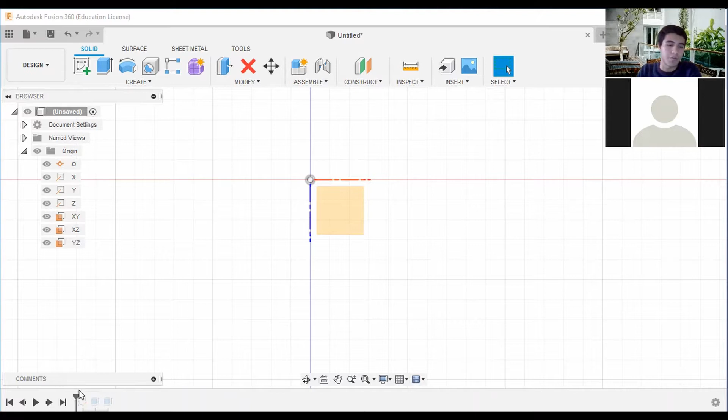You click and drag that tab and you can see the sketch. In this case I got a head start, but this is a sketch for a heart. Let's say I want to edit the sketch. I can right click and put edit sketch, and this will take me to the edit sketch plane where I can modify exactly what I want.

Let's say I don't want this heart, I want to change it up a bit. I can click trim and delete elements of what I want to change. So let's start from zero, scrap that idea, and start a new heart.

To go over some basic shapes and geometries for Fusion 360, we have our circles, center diameter circle. Let's do that to draw a heart, and I'll be modeling after this one I took from FIU. It's a nice little box, more or less fitting the size of my palm. I measured it with a caliper - it's like 70 by 75 millimeters.

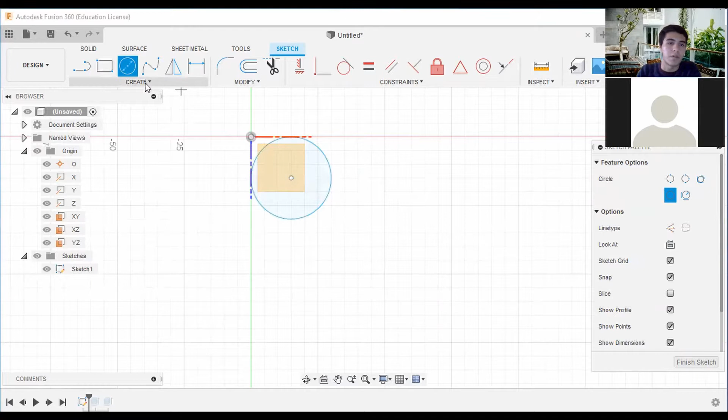So let's draw our circles. Those should be our hearts. We're going to draw a 2-point circle up here.

If by any chance you want to stop and ask me questions, feel free, go ahead. Otherwise I'm just going to continue, and you can watch the recording afterwards if you want to backtrack and see exactly what I've done. Yeah, you got it.

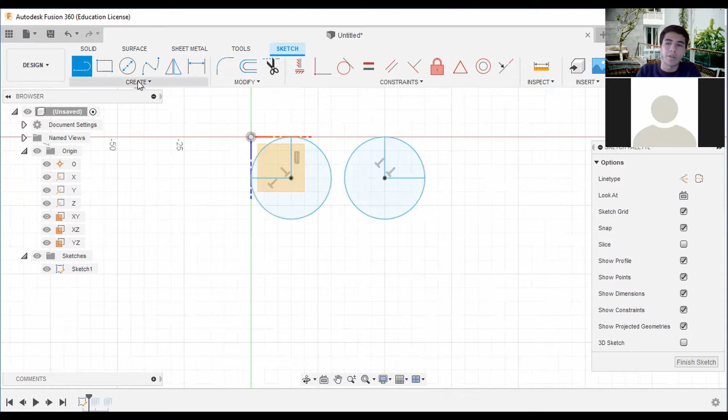The good thing between Fusion 360 and other modeling software like SolidWorks that I found beneficial is it's really easy to understand once you get the features. It's not like SolidWorks where you have to really put effort into it. Sure, practice helps, it goes a long way, but the layout of the features is much easier and more intuitive, if you ask me, on Fusion 360.

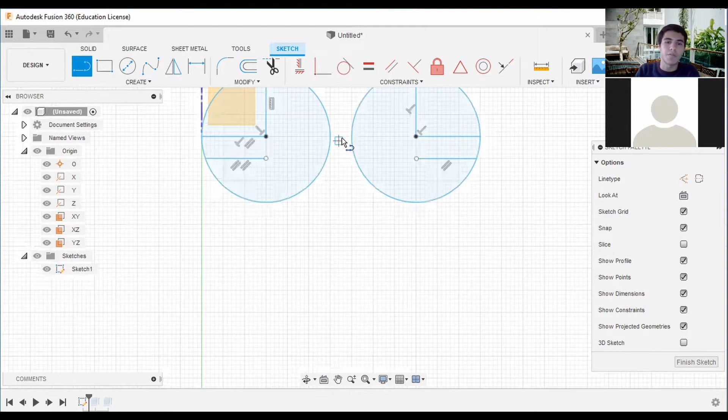Have you taken SolidWorks by any chance? No, not yet. So you probably were introduced into this before with Dr. Lim? Probably, I think so. Awesome.

So that's your advantage. We can start over fresh.

So basically what I've done so far is I've drawn the 2 hearts, and I've drawn a midline of the heart. You can see these constraints here - this T-looking thing basically means they're intersecting at right angles. This one means it's parallel, and this one in the middle means it's parallel.

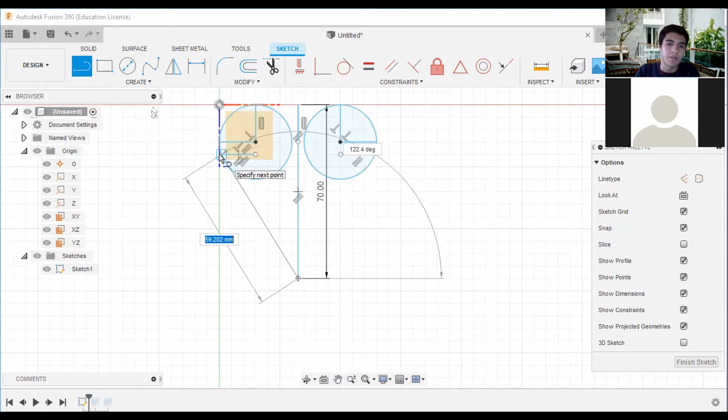So what we want to do now is create the shape of the heart. It's a rough shape, but you'll see we'll be editing these features afterwards. So what can you do now? You have this triangle-looking thing and these 2 circles.

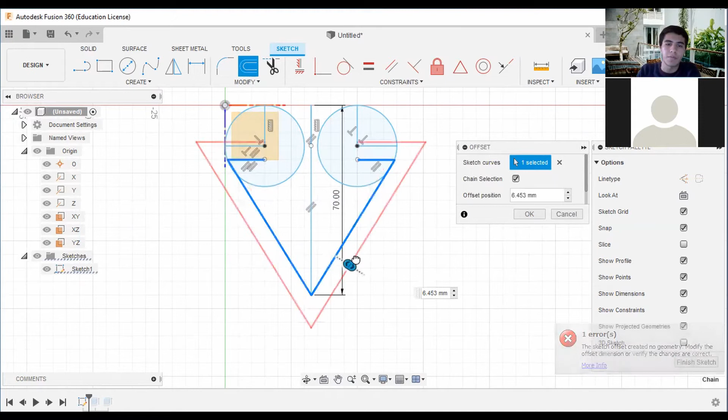Let me introduce you to a feature called offset. Offset is basically going to take a shape that you've drawn and offset it. That's useful if you want to create an offset of a sketch.

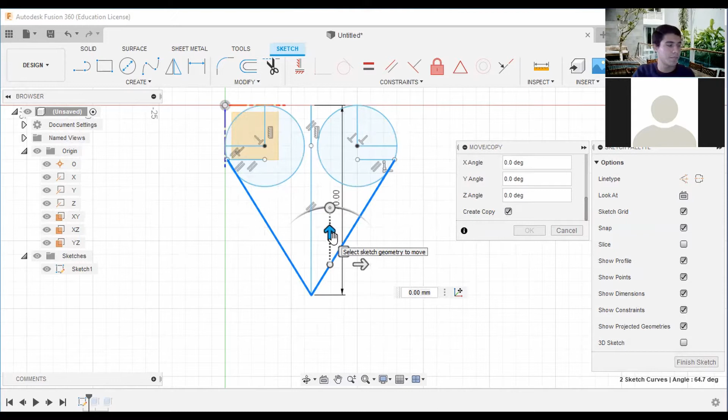But what I'll be showing you now is how to move and copy a sketch. With your mouse, you click move and copy, or with your keyboard you just click the shortcut M. Both ways work - you click and drag your sketch and move it. If you want to create a copy, you click copy, then click and drag, and it'll create a copy of your sketch automatically.

And that will be useful since we want to create this V notch on top. Let's cut this off - with our trim tool it'll cut off our extra sketches that we don't need. And now we can click fillet, and that will round our edges, which gives us this general heart shape.

You can do that here as well - 5mm fillet. So by the end of it, what do we got? We've got a general looking heart shape.

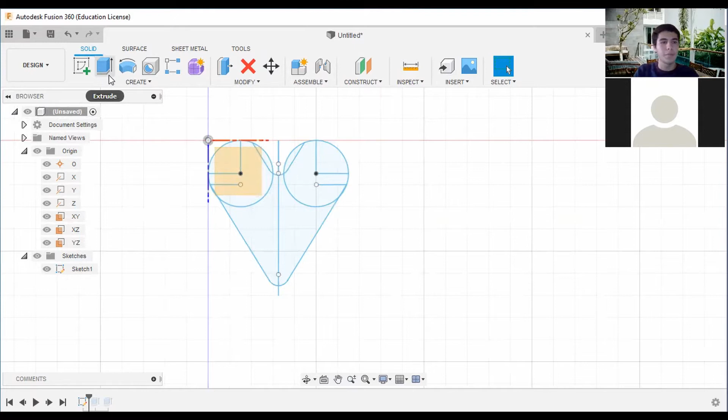And now we want to extrude this sketch to give it a solid body. So you click extrude. It asks us, well, what do you want to extrude? You go ahead and highlight all of this.

Now we want to select how much you want to extrude. 20mm is around the size that we're looking for. If you want to go higher, go ahead, that's fine - one feature that's new to Fusion 360 that I've noticed at least.

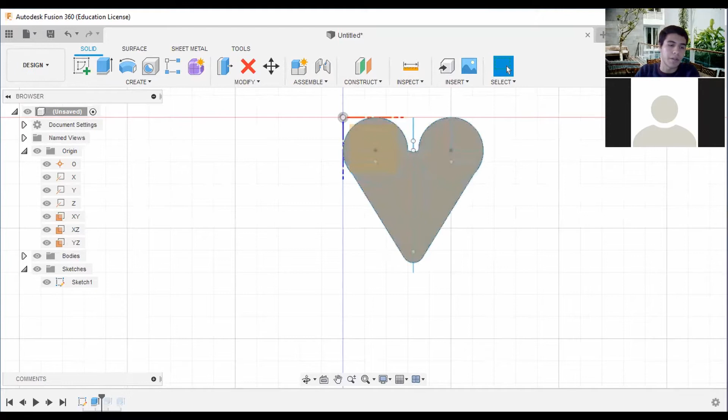So now you see this extrude shows up here. If you want to, you can go ahead and edit this feature. One feature I've noticed is new to extrude is this thing called thin extrude. So what's thin extrude? It basically creates an outline of the thing you want to extrude. See the difference?

The difference is between the blue and the gray, right? Say again? The difference is on the gray part that just showed up, right?

That's right. If you have thin extrude, it only creates a thin layer of the wall for that whole body. If you do a regular extrude, it'll create and extrude the whole sketch. So for this one, since we're making a box, it'll be much easier for us to do thin extrude.

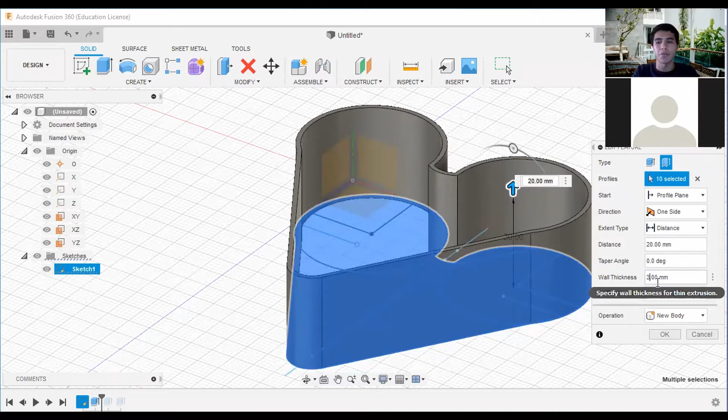We'll do thin extrude and set the wall thickness to 3 or 2. That looks nice, so 2 will be our thin extrude, and our walls will be 2 millimeters thick.

Now we have the walls for the box. We're missing the top and the bottom, which is just another extrude. So we have our extrude profiles, and we're going to click and drag everything again. See how it starts from the bottom? That's for our sketch. In this case, we're going to do a regular extrude, and extrude 2.

It gives us some options here to extrude, and we're going to do join, since we want this new body that we extruded to join our old one.

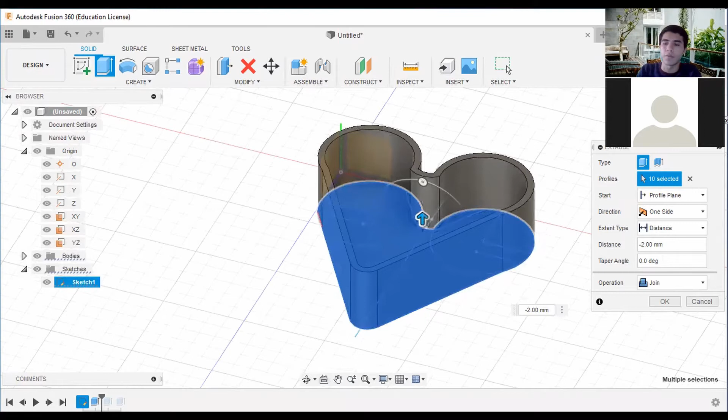On the left side you have your origin, bodies, sketches, and construction if you make any. Every time you make a new body or sketch, it shows up there. You can click this eye icon to hide it if it's bothering you. Let's say this origin is bothering me - goodbye, it's gone. Now I can just work on the bodies.

Any questions so far? Yeah, so far I think I'm following along. I'm following. Okay, great. Wait.

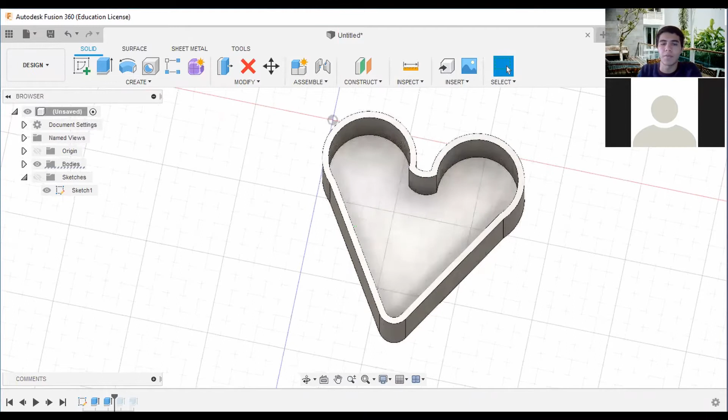There's one question though - I know how it showed the difference when you did the thin extrude versus the regular one, but what's the advantage of that? Where would you use it?

Sure. Right now, since we're making a box, it would be easier for me to use thin extrude because the walls are made automatically. If I use regular extrude, I have to make a new sketch so that it has the thinness of the wall. You see how I have only one sketch right here?

If I want to make an extrude the regular way to create the walls, I would have to create a new sketch that's the shape of the heart but smaller, so that I can extrude only the thin walls. So I save myself time by using thin extrude. Because it creates this sketch, it looks at the outer shape and creates an extrude based off of it. That's thin.

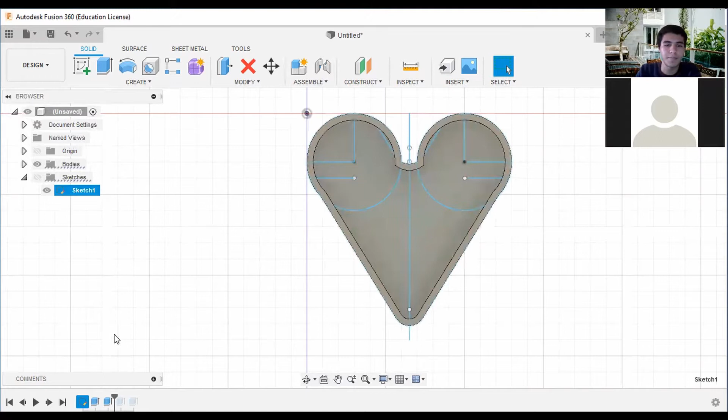Hey, but can you specify the thickness, or does it do it automatically? Yeah, I can specify the thickness here. I went to thin extrude, and you see on this, I can indicate the wall thickness of 2 millimeters. If I want to make it bigger, I can make it 10 millimeters. See how the difference is now?

Okay, I see that. So basically what you want to do now is create a top section for this box to cover it. In this case, it's going to be more or less an identical replica of this profile we have here. So what we could do is extrude this now.

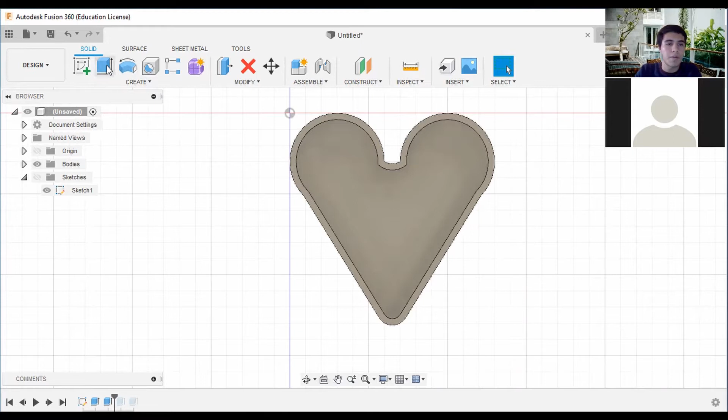One second. I can extrude this, and here we go. How about this, to make it even better?

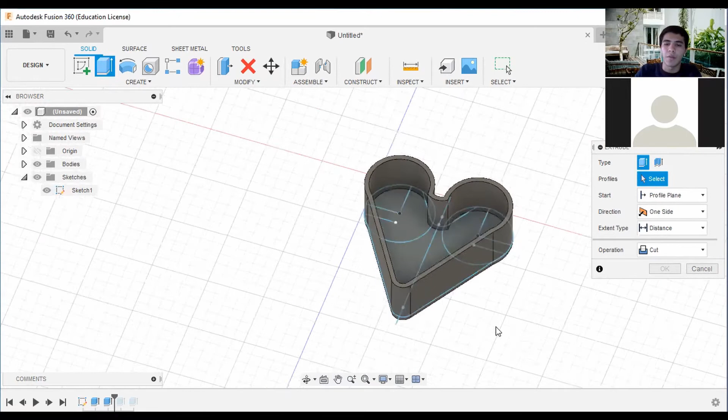We can create an extrude using our sketch that we had before, the bottom one. In this case I'll show you another type of extrude. The types used so far are thin extrude and one-side extrude. But in this case, we want to make it 2 sides - so what is the difference between making it 1 side and 2 sides?

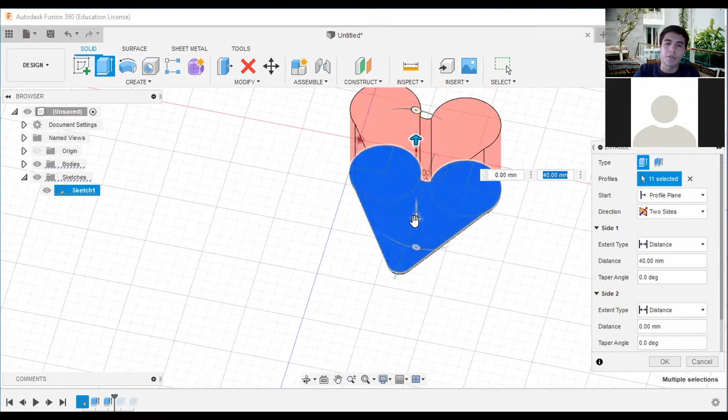One side is just going to give you one direction to extrude from, but 2 sides gives you 2 directions to extrude from. In this case, I want to extrude from this side, and grab the other side and bring it up to that level, extruding it as well from this side. That's going to allow me to create a body using the sketch plane, but offset from the sketch plane.

See how the original sketch plane is down here, and my new body is up here - because I was able to take the 2 directions of the extrude and bring up one direction so that the new body is up here.

Right now it's at 5 millimeters thick. Let's say we want to make it thinner - let's make this 3 millimeters thick, or 2 millimeters thick, and then we'll leave 2 millimeters so that I can ingrain it into the other one.

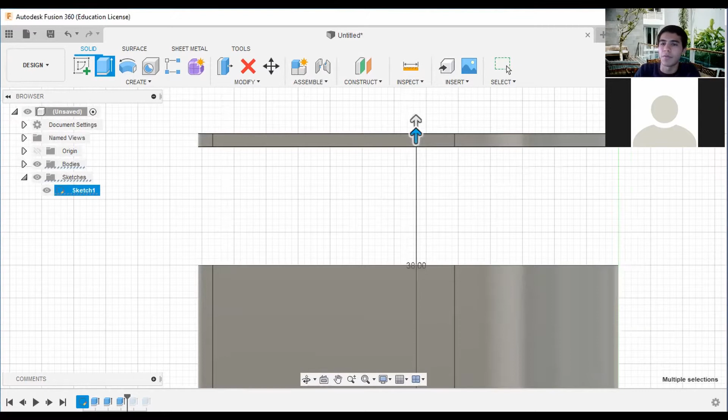What would this do? It would basically give us a new cap, and we can repeat this if we want to, for example, have this cap snap onto the other box. So let's repeat that feature.

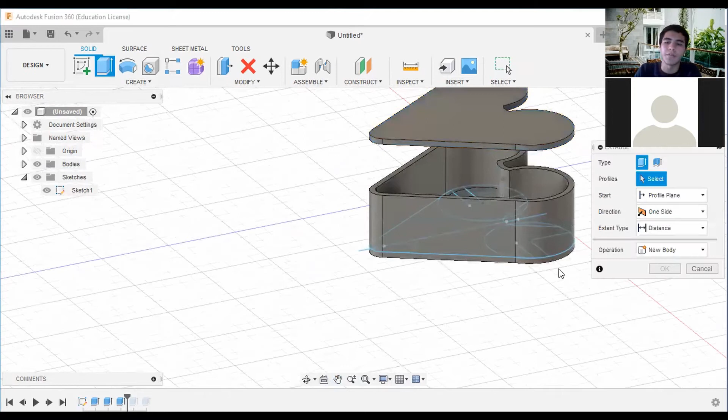Extrude again, and in this case we'll be doing a thin extrude - a thin extrude because that's what's going to give us this thin outline. And we'll do two sides.

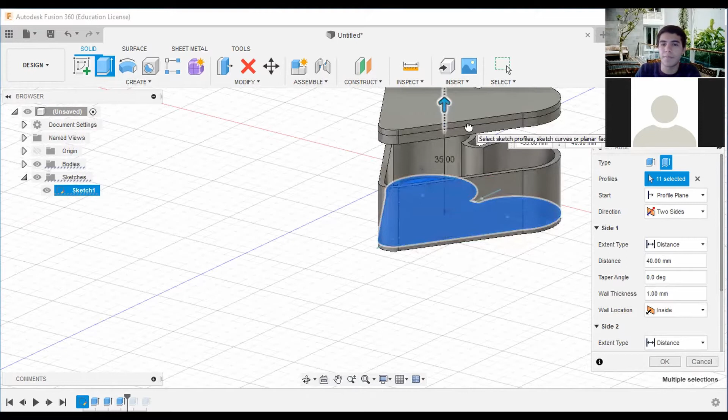There we go. So we have our thin extrude, let's make it 2 millimeters in. So it'll look like that. See our thin extrude? Yes, so let's take away this body now, and let's take away the sketch.

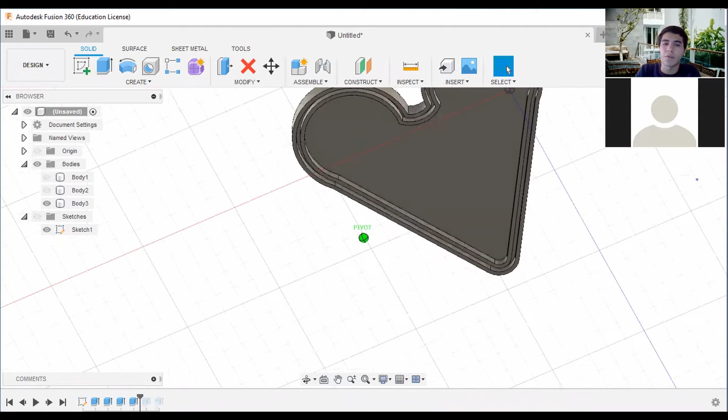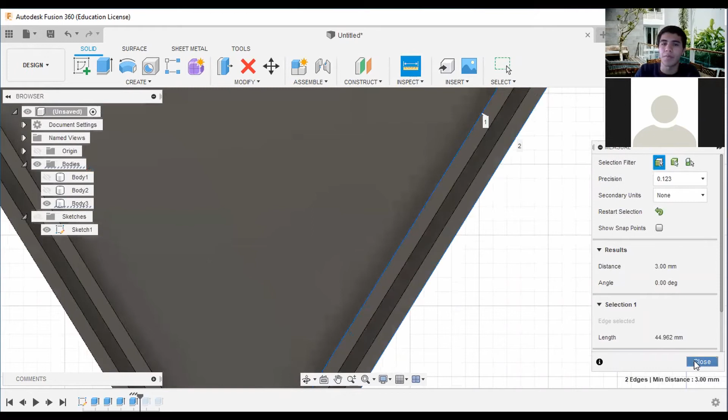With the thin extrude, we basically made an outline of the shape to make the cap for it. So we're going to find a way to put this cap onto the box. We can use our measuring tool with inspect on this side, measuring the distance from here to here. It says that is 3 millimeters. Let's take it one more time, inspect the distance from here to here, and that's 1 millimeter.

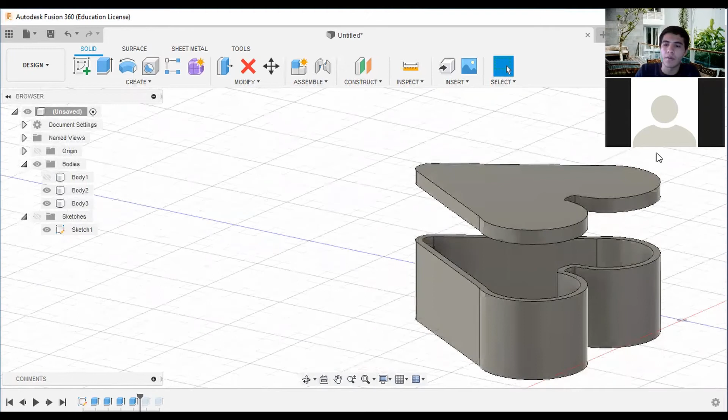So our profile that we're going to be using on the box needs to be 1 millimeter so it can snap onto this cap. Let's go back to our box. In this case here we have the body, our box is down there. So now on this box, let's go back and create a new sketch that allows us to engrain this onto this cap. There we go.

So we said it was 1 millimeter, that the opening we have. So what we can do is create a thin extrude from the original sketch, but instead of using a thin extrude to make a boss, we're going to make a cut. So instead of adding material, we'll be cutting material. Let's try that.

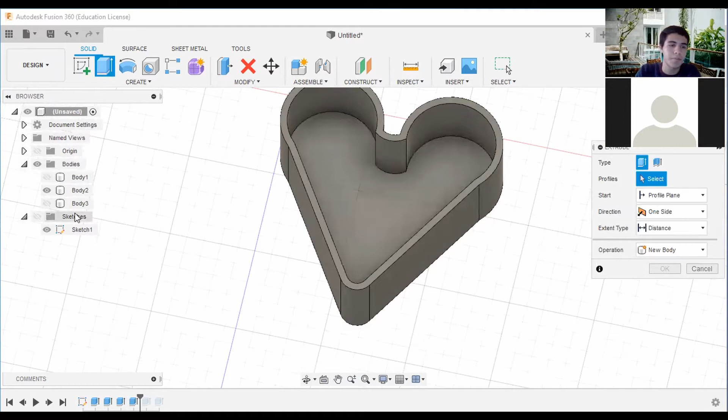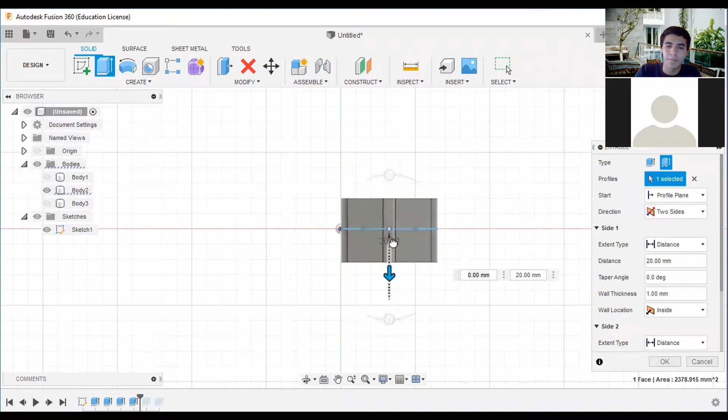Bring back our sketch. Highlight. Make a thin extrude, and we'll make it two sides, so in this case we bring this material up here. There we go. See how it's a thin extrude, but now it's cutting into the material. That's going to be our rim for the other box to engrain inside. So let's cut it. Looks nice.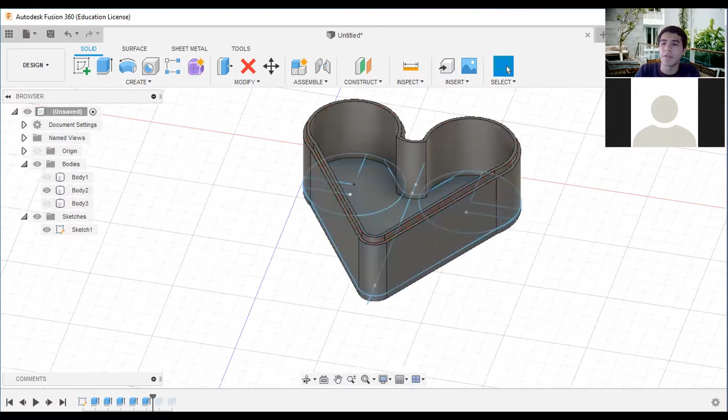Now we have our thin extrude, cap, and box. All that's left to do is put them together. To do that, we can click move and copy, and it specifies what you want to move. We're going to move this body, all of it, down here.

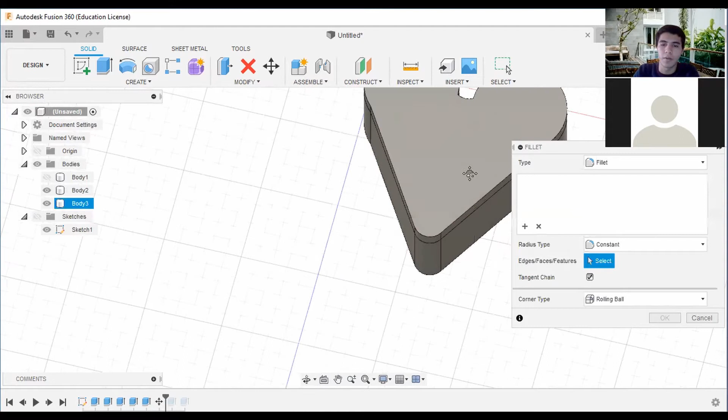That looks good. So now you have a box, let's do some final touches to it. We want to fillet it, make the edges smooth. We can fillet both sides down here, and we can add, let's say, a 2 millimeter fillet. How does that look? It rounds the edges 2 millimeters on both faces.

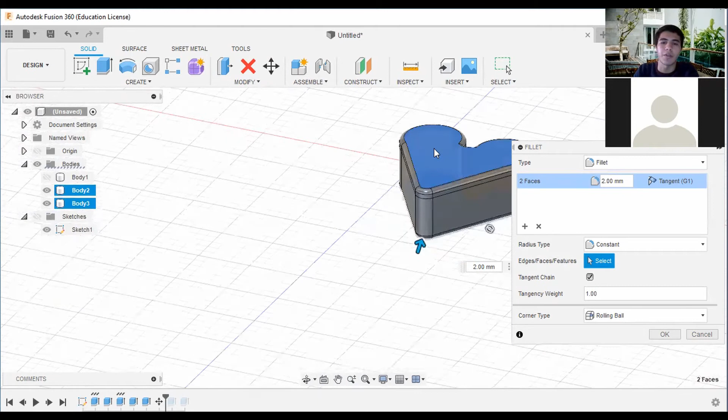Since the profile you made of the sketch is round already, you can't round those edges, but you can round these flat sides. For example, this one you can't really round because it's an extrude of something that is round, so this entire face is round. Also this side I don't think you can round, but for these flat sides, you can.

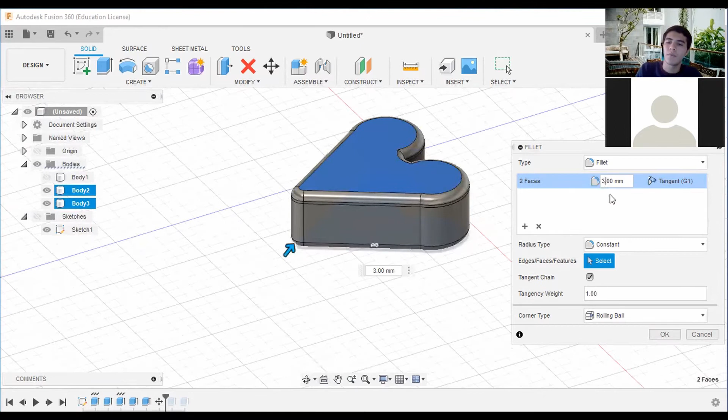Maybe you can try different values until something works. Hey, look, 3 works. Can we try 4? Let's try 4 - 4 works as well. So let's leave it at that, at 4.

So here's a trick you can do. Now you have a box with a top and a bottom, right? But you have no way to see what's inside of it, and you know it's empty. So we're going to do section analysis. What that's going to do is basically cut this figure that you made in half so you can view the inside of it.

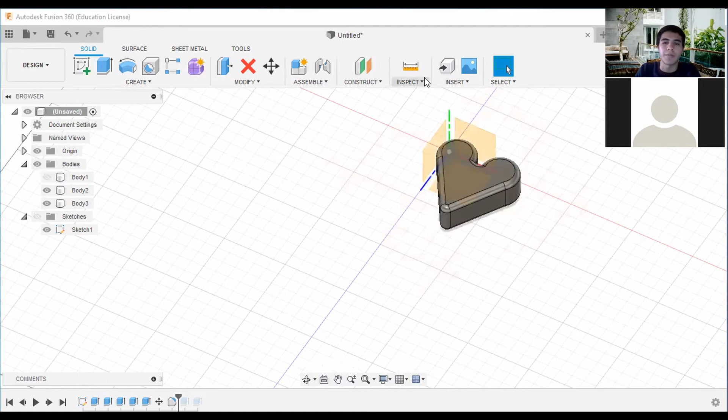You can choose the face you want to cut it from, so that's up to you. In this case, I cut it from top to bottom, but let's say I want to cut it from the side. So I go here to section analysis, and I cut it from the side. See, it's from the side now? And so I cut it.

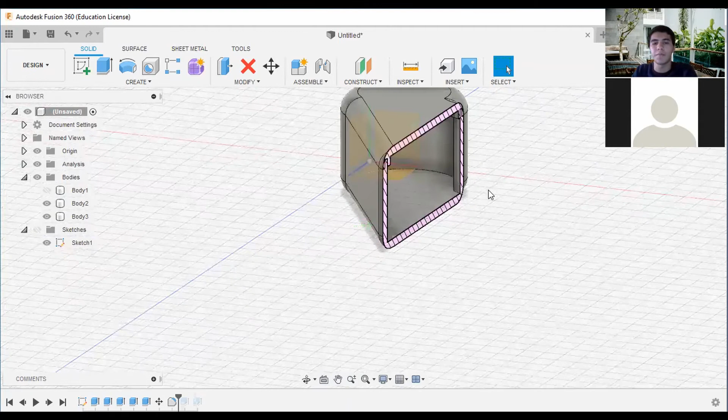I can see the place at which the two, where the top and the body came together, and I can move it if I want to. Any questions so far? Not yet, not yet, so far so good.

Sounds good. So now we have this empty box, and let's say you want to fill it because life's like a box of chocolates. So let's make little sections so we can put stuff in it.

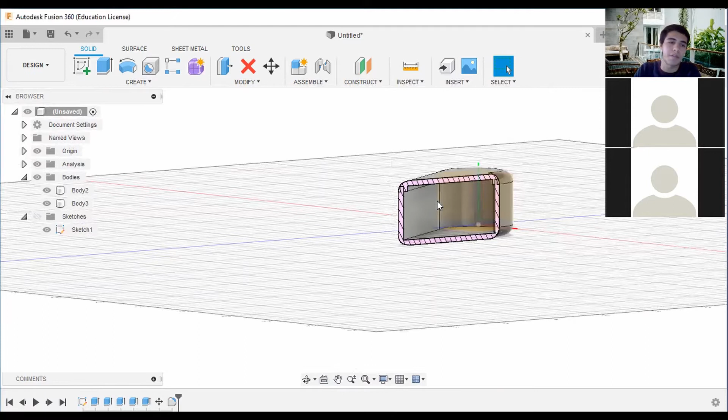So now we have our cross-section analysis. We can see the inside of the box, and let's say you want to be able to now put stuff inside. Let's make a new section analysis, in this case from the top, so we can see from the top inside what we want to put in this box.

Every time you do an analysis, you can see this analysis tab opens, the same way you have body sketches and constructions if you make constructions.

So I'm looking at this box from FIU. It has some compartments in it. I'm just going to be modeling based off that. But more or less what you want to do is create a sketch, the same way you create a sketch for the heart. And we're going to be making different boxes for this.

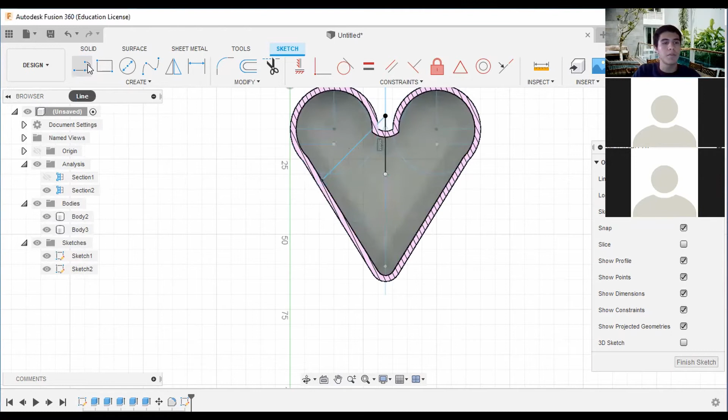So the good thing about this is that we don't need to do an exact sketch. We can more or less eyeball it. But I'll be showing you some tricks to help you make a precise sketch regardless of how it looks.

So my line. Awesome. So here you have these two lines, and these are basically the compartments.

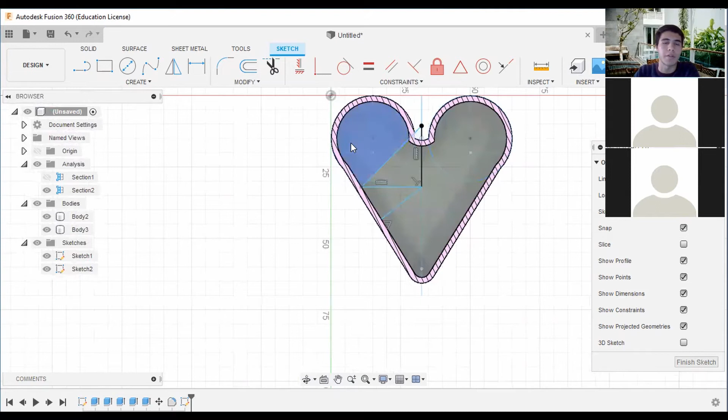We want to offset it to give some thickness. So let's do an offset. Let's offset by 1 millimeter. So we have this - basically what's going to be showing up in the extrude is this. Let's close this here.

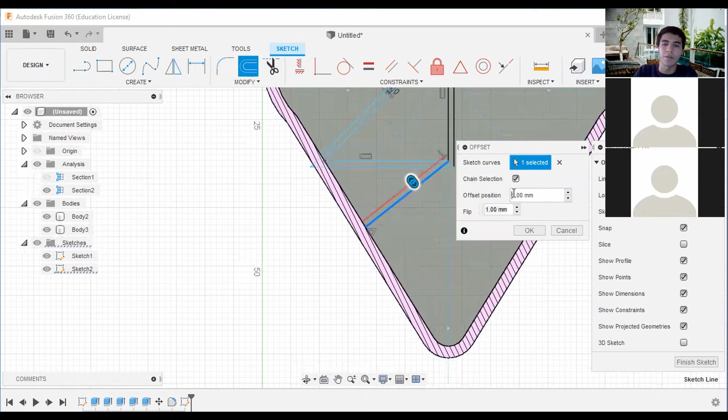Let's do one more offset right there. Let's offset it in the other direction, so we'll put a negative offset. There you go.

And now let's say you want to make this line parallel - this line right here parallel to this line. You can click here, put parallel, and then make them parallel.

Let's try this again. So this line here, we want to make it parallel to that one. Now it's parallel. Now we can click the offset. The reason it gives me an error is because you're trying to make something parallel with a feature that doesn't exist. So once the offset is made, you can reference the offset to make more modifications, because the offset itself is a modification of the original line or the original geometry.

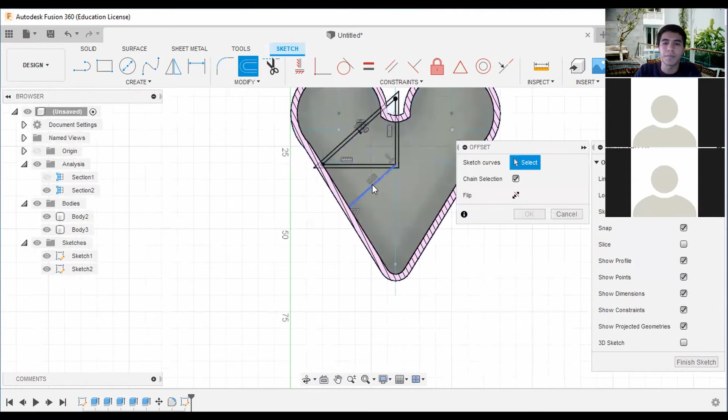What you can do is reference the original line and then modify off that, which is what we did. So we first made them parallel, and then we did the offset. And now we more or less did the compartments of the box: 1, 2, 3, 4 compartments.

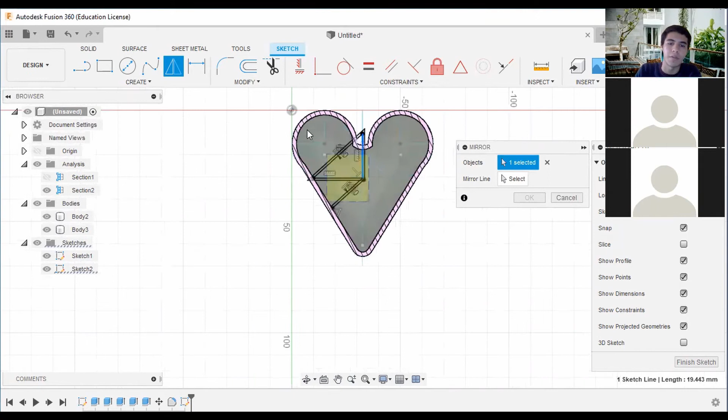And then you want to be able to mirror this on the other side. So we have an option here to click mirror, and we're going to mirror basically all of this. Mirror line over here. And now we have different compartments.

Let's finish the sketch. Wait, repeat that last part again. How did that work? Yeah, how do we do this? Simple. Yeah, there. You click mirror, yeah.

So you see how you have this mirror tool right here? Clicking mirror allows you to highlight these objects that you want to mirror. So in this case, I want to mirror this triangle here. So I click this triangle and I click the mirror line I want to mirror it on.

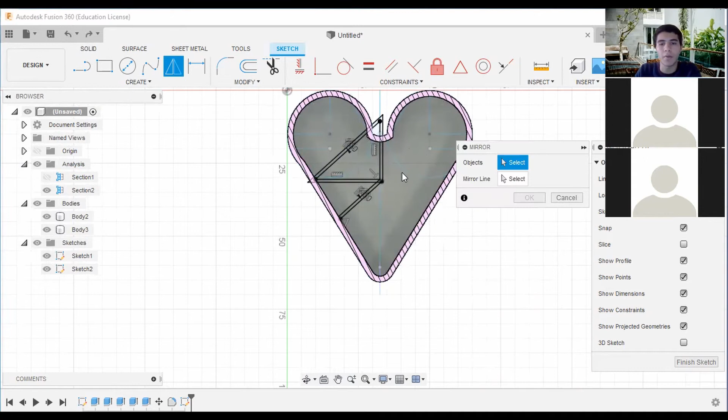So let me go ahead and undo the mirror and show exactly that step again. All these objects, I selected them. And I click the mirror line I want to mirror it on - in this case, it's the midline for my entire sketch. That's it, it's done. So you can mirror modifications.

You're right, you can mirror modifications. If I wanted to, I can make half a heart, right? I could make half a heart and then mirror it so I can make the whole box. So that could be done. And if you want, I can show you more about that after this.

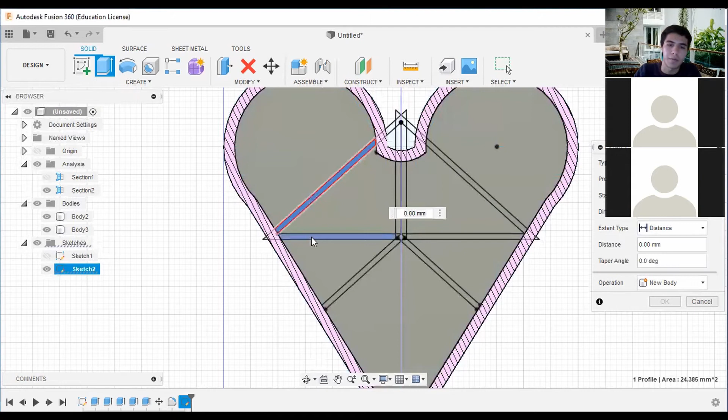So basically, I'm done with the sketch and I'm going to extrude the sketch now. So I'm going to make my sketches visible and I want to mirror this line. And just getting back to your point, yes, you can mirror modifications. So let's try that here.

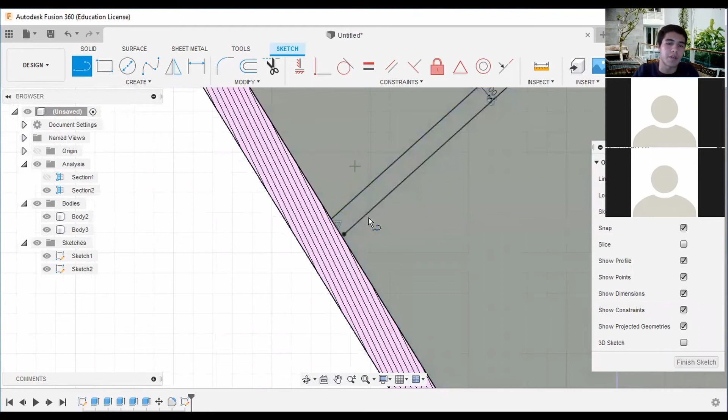First, I need to finish the sketch. So you see how when I try to click here, it wouldn't let me highlight this particular sketch I wanted - it highlighted its entire body. That's because this sketch is not finished. See how there's an open space here? You can't really have a sketch unless it's closed. So one thing to regularly look out for in all your sketches is to make sure they're closed.

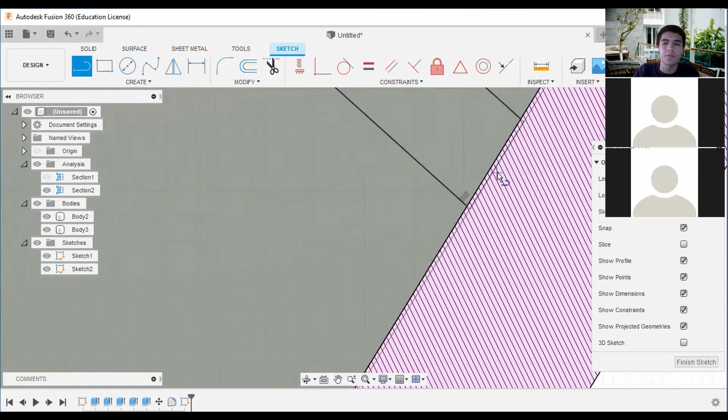And in this case, you gotta repeat the same thing on their side. And here's a tip: usually whenever you see a dot in your sketches, it means it's not closed - it means that sketch is open. But now it's closed, hopefully. And let's mirror it.

All right, let me show you exactly what you can do to mirror it.

So we have our sketch, and we're going to extrude it. Instead of cutting it, we're going to join them, joining those two parts together. So we have join, that's good.

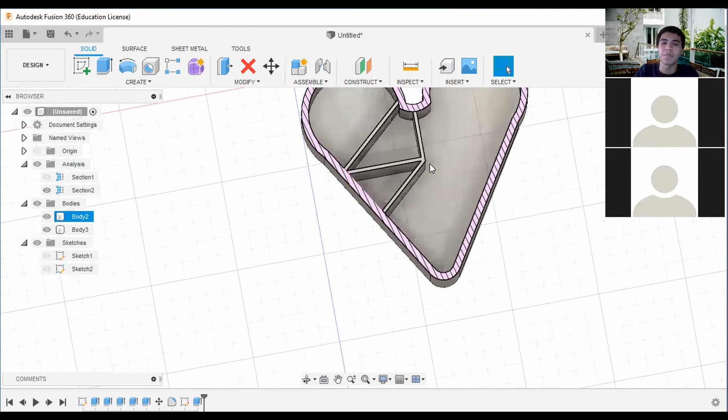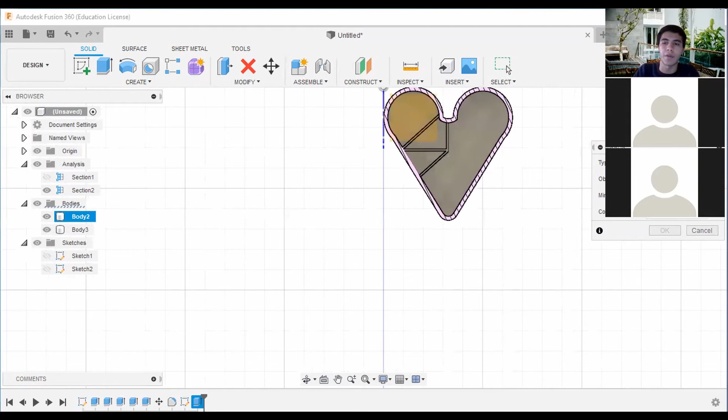To mirror it, and to mirror in this case features or bodies, go here to mirror, and it gives you the option of what you want to mirror. I want to mirror a body, or I want to mirror a feature, and it shows me what feature you want to mirror, that one. In this case, it indicates what plane I want to mirror it on. I don't have any plane right now, and the only planes I do have are the origin plane, so what can we do? We're going to construct a new plane.

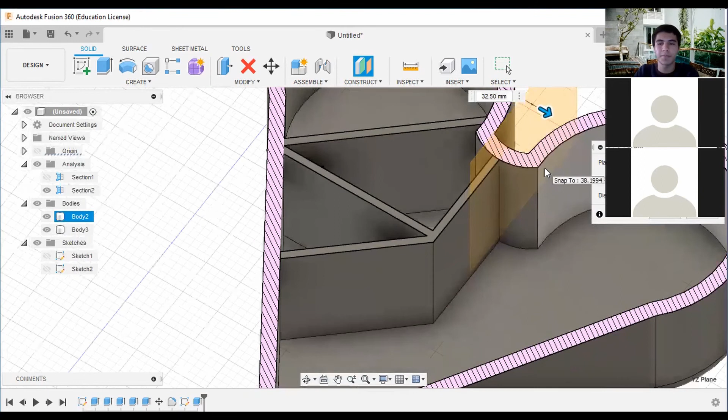So now we're going to go to constructions, and we're going to construct an offset plane, so we can make it at the middle of this box. You see this orange line I'm dragging right now? That's my offset plane. Now you see it? So I'm gonna take that as yes. Basically with this offset plane, I'm gonna put it at the middle of the box so I can mirror the feature like you were saying earlier.

So now I can go back and click mirror, and now I have an offset plane. I can go back to my features and click mirror plane, and there, it's done. I'm gonna click optimize, since usually that's the best option for mirroring features. Sometimes you get some weird errors for that.

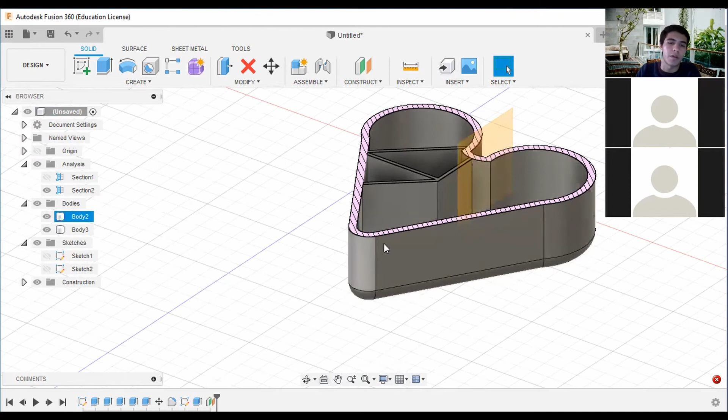And that's fine, compute failed. That also has to do more or less with the sketches that you make. Some sketches, and this is something I learned recently, some sketches you can't mirror because the sketches by themselves are non-manifold. It basically means the sketches could have some sort of faulty error in them, and that's no fault on you or on the sketch itself. It's just that the model is trying to compute something that when you take it to the 3D printer, you can't 3D print because either of the sketch size or the body size. So let's try this again, let's try the mirror. And if you want, you can do some research into what non-manifold is. It's just weird.

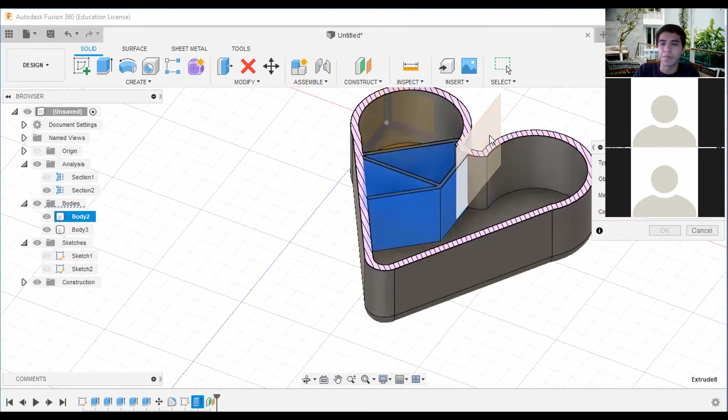There you go, we click adjust, and in this case adjust works for us. So now we have our box, we have our compartments. Let's go ahead and put the lid on it. So we take away analysis, and this is how our box looks right now.

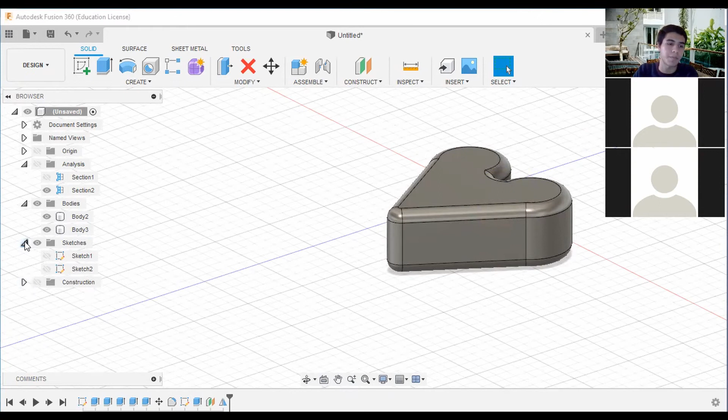You'll notice when we did construction of a plane, now we can close that since we know our plane is there. So we have a box, and more or less this is what it's going to look like. Let's put some colors to it, right?

So we click appearance, and what that does is give us the different material and color properties available for us. It's a library of things you can have. In this case, we'll be skipping to paint, and let's put a glossy finish. So you have these basic colors, and you're like, well, that's not pink, I want pink, right? So we can go ahead and click our color. In this case, we want to apply to bodies and components. So what is a body, what is a component?

The difference is bodies is what we have right now, just the body itself, the entire solid body. So we go here to our bodies, and there's two bodies, right? The body for the box and the body for the cap, straightforward. Now, here's the thing: if you want to make an assembly, then you need to make it into a component, because you can't create an assembly from bodies. And that's just a Fusion 360 thing.

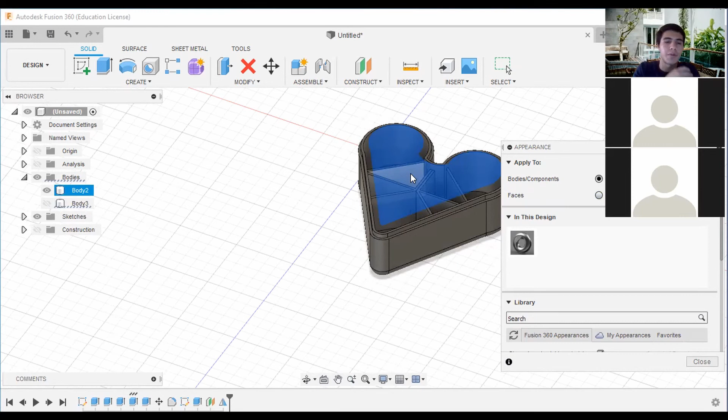So whenever you apply a material property to a body or component, it's to that entire thing, in this case our cap and our box. And if you want to do it for faces, well then that's more or less straightforward, you just do the face. There are several faces in a single body. But in this case, we want to make a body.

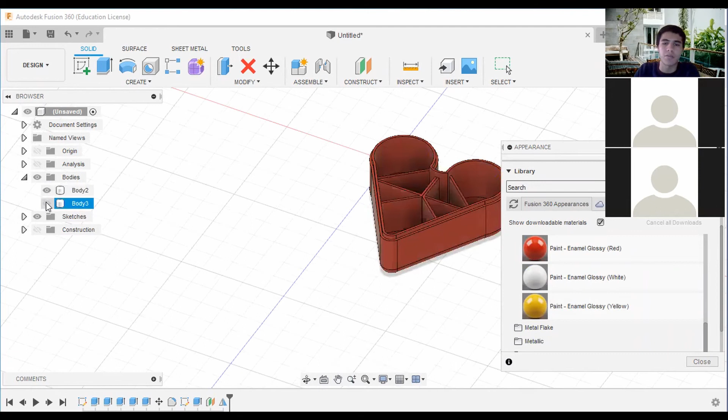So we go here and just click and drag red onto our body. Look, now it's red. And let's say we want to do the exact same thing to our cap. Now it's red. Now let's say, you know what, I want pink instead. You go ahead and you go up here, click on your red, and you change that to pink.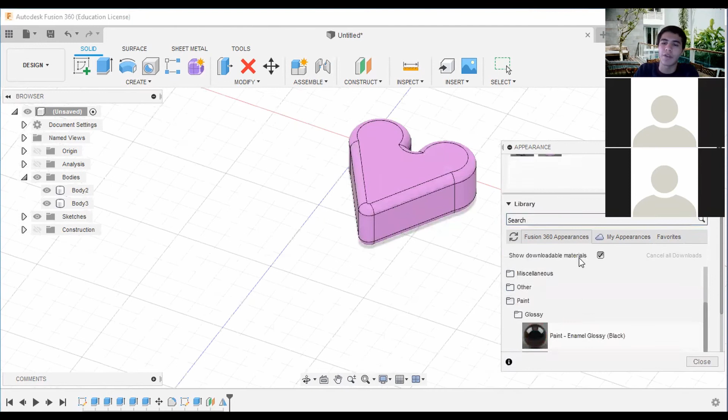Okay, just gonna eyeball it, but it makes the point. Now you have pink. And let's say now you want to go back to red, or I can go back to red. In this case, I want to apply to the face now. There, now I have red on that face. More or less, that's how it works.

Any questions so far? Nope, not yet. All right, sounds good.

So let's just make this aesthetically pleasing. Let's make the edges red, and let's see if that's possible. Yeah, apply to that face. We'll make this face red, and the body itself pink.

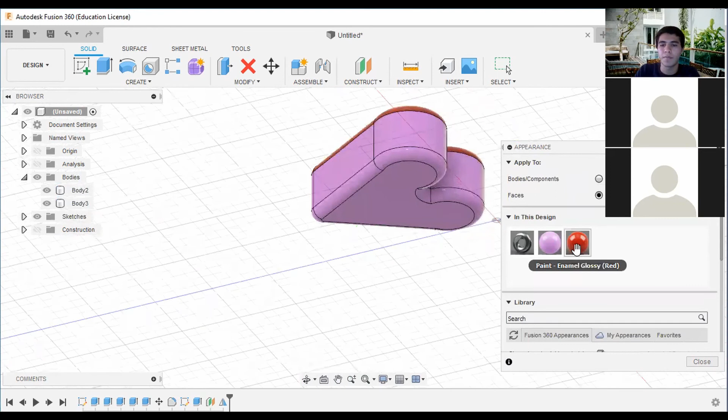So for the different colors, it's for you to more or less experiment with. That's up to you, your choice of experimentation, that's fine. But what I'll be showing you afterwards is how you can make this presentable in the rendering studio. So let's say this is your box, you're like, awesome, I love it.

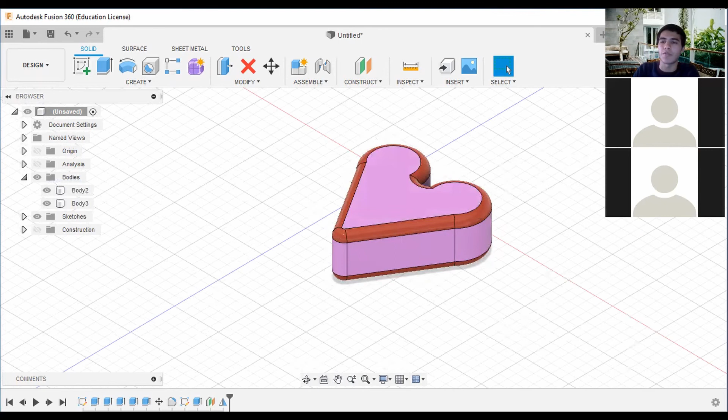I want to make this a professional render. There's still one more thing you could do with it, let me show you that. You can go and click quick sketch, and let's say you want to put your name or whatever. So let's put your text. This text is basically going to create text on this box, either your name or your significant other. I'll put Alex.

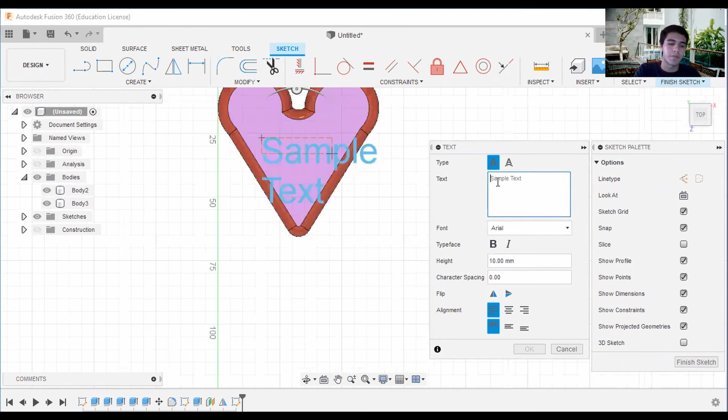And so you can click your font size. I'm going to just go for any Calibri. Light. Hey, welcome, Valentina. Comic Sans, there we go.

And so now you'll be able to write on your box. Make it aligned in the middle, and you're happy. You click finish sketch. Now let's extrude it. You want to extrude the sketch.

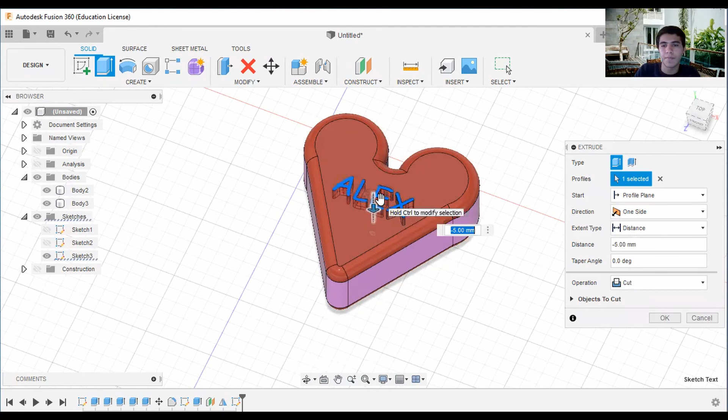Our third sketch is right here. You want to cut into it. Here we go, repeat extrude. In this case, we're cutting into it 5 millimeters. That's a bit too much, so let's go ahead and cut it less. 1 millimeter sounds good. We cut into it, and now we have our name on this box.

So now you know how to create boxes, how to extrude, how to mirror features and bodies, and now you even know how to write your own name in the box. Pretty good.

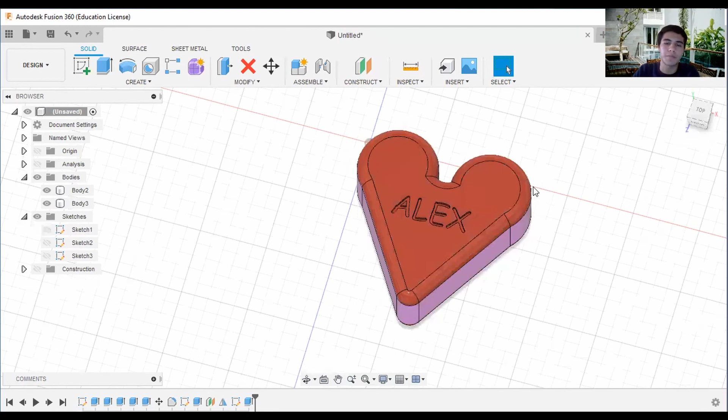We go back to appearances, go to faces, and put this pink. And now it's good so far. That looks really pretty, thanks.

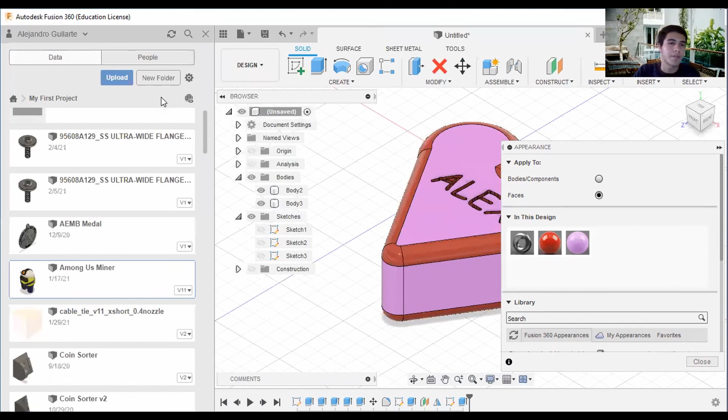So now we have this box, we have our name on it. We're ready to send it off to whoever we like, but we want to render it. And since everything's now virtual, we want to make it look nice. So we go to render, and we go into our rendering studio, and it's going to bring our box.

But now it's going to make it in this virtual studio. We can work with the lighting and the angles at which we want our object to look and how it's going to look like. So we set up the render, and it's going to set up the scene settings for it.

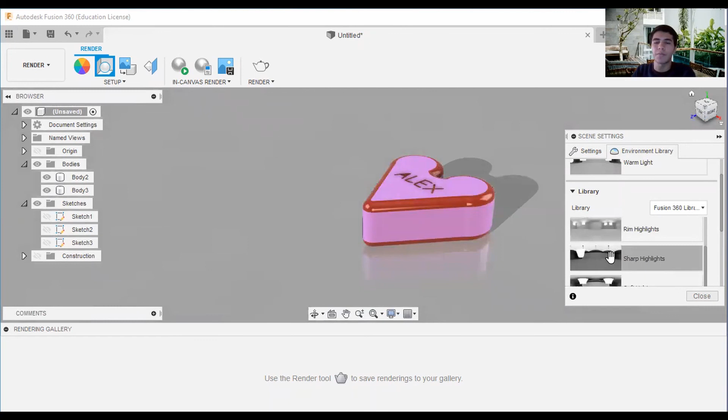Right now I have it set to sharp highlights, but there's a library of different other features you can incorporate. So we can play with cool lights, grid light, can play with rim highlights. Sharp light is what I have right now, soft light, and warm light. So I think the best one, and that's just preference, over a certain period of time you get an idea of more or less what looks good on different colors and materials.

Just the materials have their own properties and look different as well. I think grid light was good, so here you have grid light.

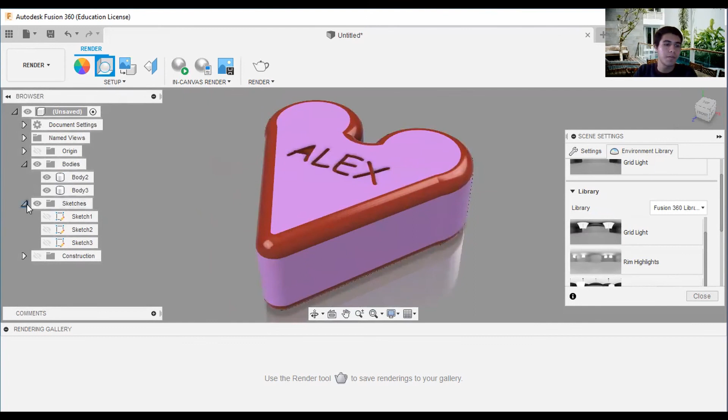So some settings you can incorporate here, although I don't usually play around with these. The brightness, leave it as that. Environment, you want to make it an environment or a solid color, you can. The ground plane, different features you want to incorporate. The roughness, how rough this image looks, you want to make it rougher or not. The camera perspective, the focal length.

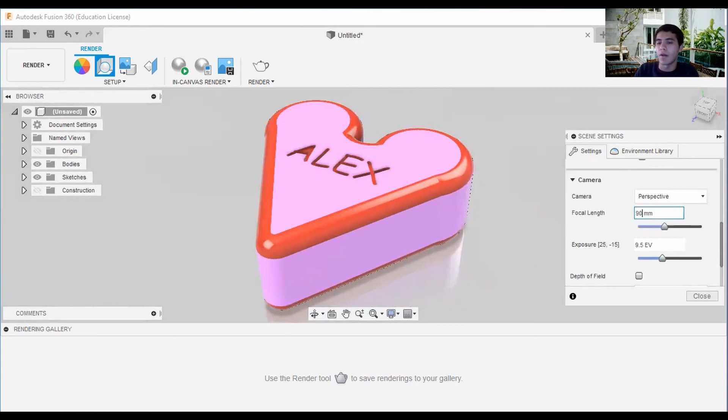Wild. But basically, most of the times I keep this reset, I keep this to the default. So down here you have the option, let's say you messed it up, you restore the defaults and you're back to a regular box.

So you close it and you're like, okay, I'm satisfied with this. So you click render, so you save your tool. In this case, you save your design. And now you can start the rendering process.

And so now you just wait, you just wait your 10 minutes for the rendering to occur. And it's going to basically create in this virtual studio a representation of your image depending on the material properties, the color, and the lighting. So the opacity, the reflectance, all of that, it's going to be factored computationally, and you're going to end up with this nice looking sketch, this nice looking image of the box.

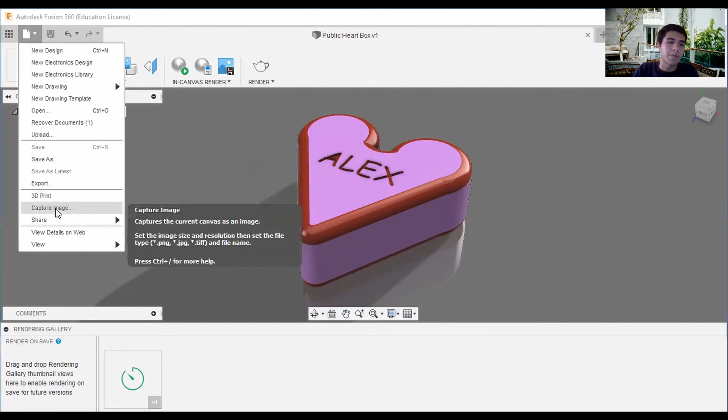What you can do in the meantime, you go here to capture image, and you want to capture this box you made somehow. So you click capture image, it's going to save this workspace that you have. And you can keep that for a memento or whatever.

So any questions so far? No, not yet. So yeah, we pretty much reached the end of it.